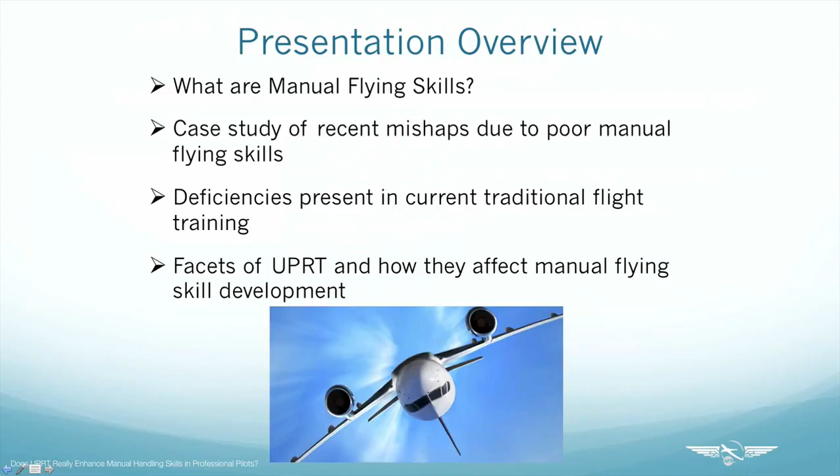So again, does UPRT really enhance manual flying skills in professional pilots? This is a broad question, encompassing both objective and subjective subject matter, which spans many different facets of aviation. First, the term manual handling skills needs discussion and definition before we explore the rest of this.

Manual flying is generally thought of as those flying abilities a pilot uses to fly the aircraft only by reference to the raw data presented in the forms of airspeed, attitude, altitude, vertical speed, and so on, through direct manipulation of the controls without the aid of automation.

This automation includes, but is not limited to, autopilot systems, autothrottles, and the variety of flight management systems currently equipped in many modern-day aircraft. These skills include complex problem solving in a crew environment, with time as a critical factor.

Basic navigation equipment usage and manual trim adjustments can be considered manual flying as well, depending on the sophistication of the equipment, really. Taking this a step further, especially as it relates to modern aviation, a pilot's flying technique may...

...combine the already mentioned manual flying skills with combinations of automatic speed and direction control and guidance. These combined inputs usually occur through individual pilot habit patterns or preferences, procedural requirements, operational standards, or when automated systems fail.

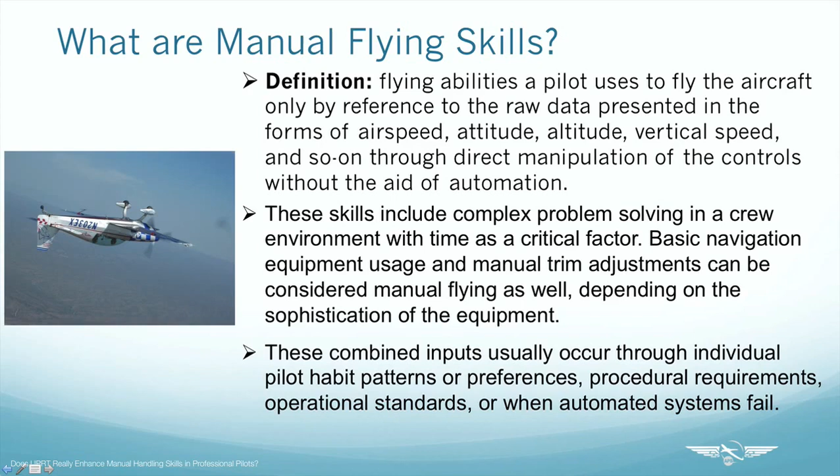The latter of these instances, the failure of automation, is a circumstance that is rare, but is cited as a contributing factor in several recent and deadly crashes. The failure of automation, or perhaps even worse, degraded modes of automatic flight, make the pilot's manual handling skills incredibly important, and are often the decisive factor between life or death in an upset.

Examination of some recent fatal accidents in the industry can provide valuable insight into the importance of manual handling, especially for pilots flying more sophisticated aircraft with advanced flight control and automation systems. The first one we'll look at is China Airlines Flight 140. We'll follow that with a look at Colgan Air Flight 3407, and finally, Air France Flight 447.

The first example, China Airlines Flight 140, was an Airbus A300-600R, which crashed on an approach to runway 34 at Nagoya Airport, Japan, on April 26, 1994. The co-pilot, who was the pilot flying at the time, after several inappropriate activations of the go-around mode on approach, and several subsequent cautions from the captain, inadvertently selected the takeoff go-around, or TOGA, mode on the approach.

The aircraft pitched up and immediately stalled. This led to a loss of control and a tail-first impact with the ground. The crew failed to recognize the stall or apply appropriate manual handling skills on manual approach. The reliance on automation and unfamiliarity of the crew with manual handling characteristics of their particular aircraft led to the deaths of 264 people and 7 more injured critically.

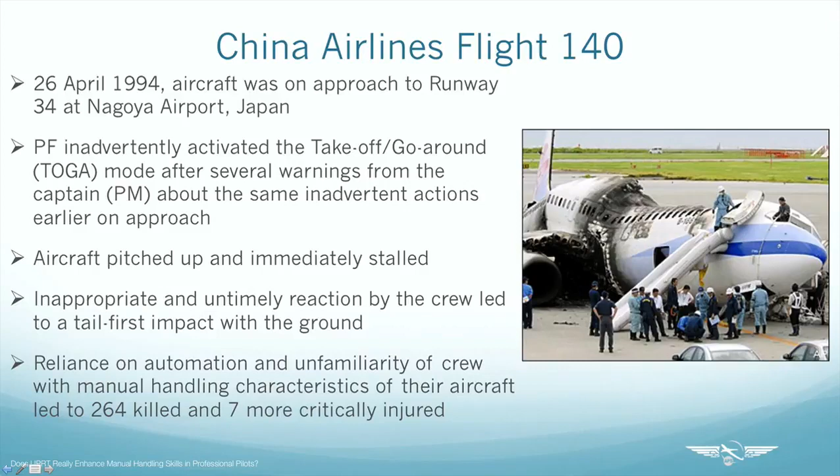The second mishap is much more recent. This is Colgan Air Flight 3407, a DHC-8-400, which was on a code-share agreement with Continental Airlines, and it crashed into a residential area near Buffalo Niagara International Airport while on an ILS approach at night in visual meteorological conditions.

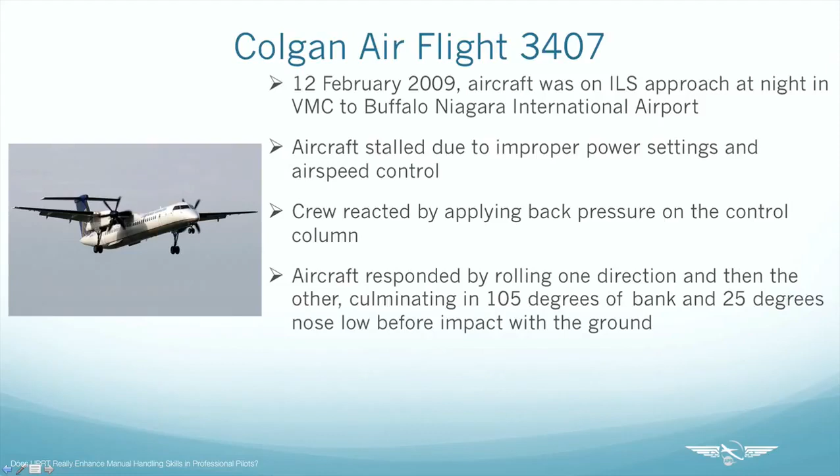The aircraft entered a stalled condition due to improper power settings and airspeed control, and the crew reacted by pulling on the control column, which increased the angle of attack further and worsened the stall condition. The aircraft responded by rolling one direction and then the other, culminating in 105 degrees of bank and 25 degrees nose low before impact with the ground.

Following the crew's inappropriate reaction, they lost control of the aircraft, which resulted in the fatal crash that killed 49 people and one person on the ground.

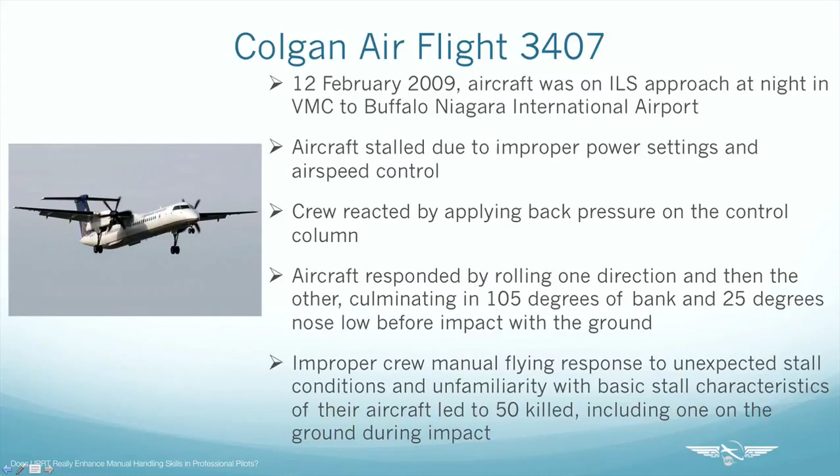Finally, and much more publicized worldwide, is the crash of Air France Flight 447, which was an Airbus A330-200 that departed Rio de Janeiro, Brazil, on the 1st of June 2009, and crashed into the Atlantic Ocean en route to Paris, France.

After a two-year-long multinational effort to find the crashed aircraft at the bottom of the ocean, the wreckage was finally recovered.

The data recovered showed that a loss of airspeed sensing resulted in the aircraft's fly-by-wire system degrading to a mode of control with fewer protections than the crew was used to having.

At 35,000 feet, the aircraft stalled, and the crew responded with a pull on the control stick and maintained that pull, holding the aircraft in the stalled condition for over 4.5 minutes until impact with the water.

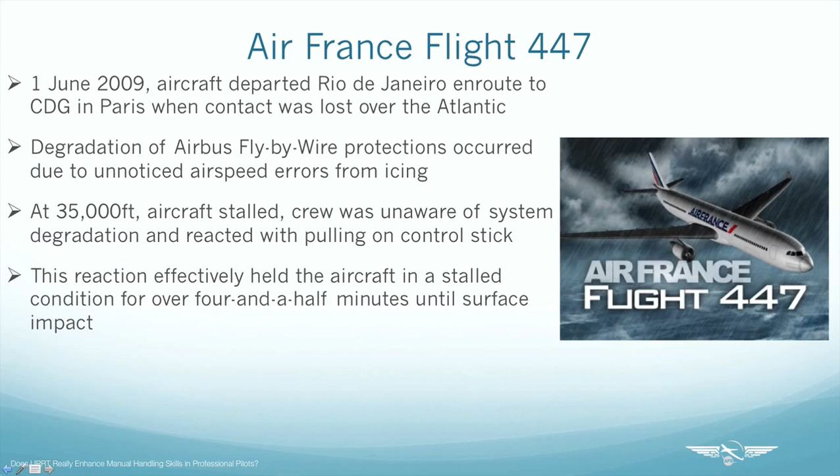Improper crew manual flying response to an unexpected stall condition and unfamiliarity with basic stall characteristics of their aircraft led to the 228 souls aboard all lost, and an exhaustive 2-year search to find the remains.

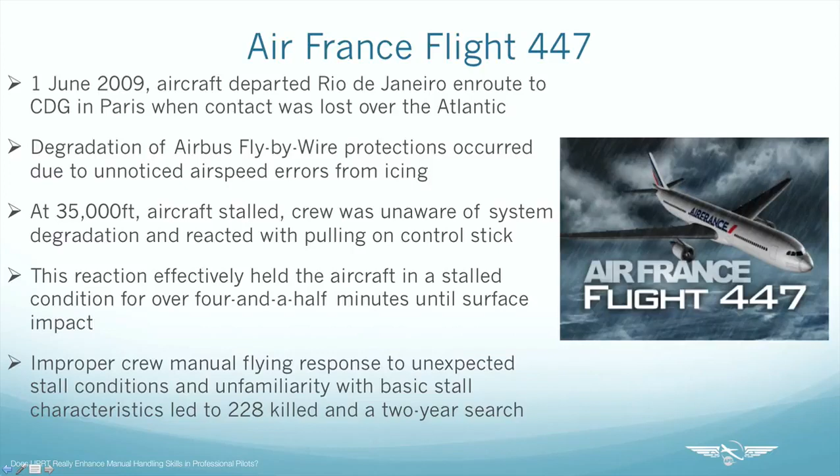These are all sobering examples of sophisticated aircraft ending up destroyed with massive loss of life, in large part due to the lack of manual handling skills of the crew members faced with the degradation of their normal automatic mode of operation. So why do we look at these case studies here?

Well, it had a resounding impact on the industry worldwide. Although there is seldom just a single causal factor to any accident, the loss of control that made these accidents so horrific would most likely never have occurred had the pilots been better prepared to take over manually.

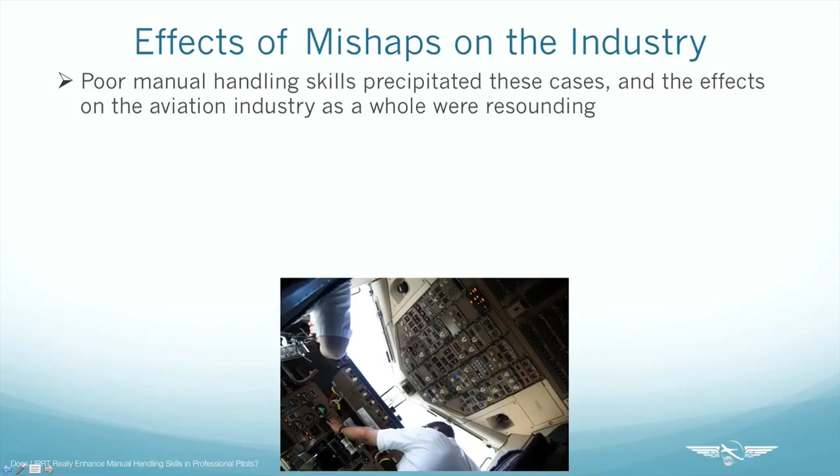So it becomes painfully clear that manual handling, as described earlier, is a critical dimension to the professional pilot's skill sets. The public outcry over the discovery that Air France 447 went down as a result of a loss of control in flight, exacerbated by an inappropriate crew response, accelerated a long overdue response from the industry that was set in motion by the Colgan accident.

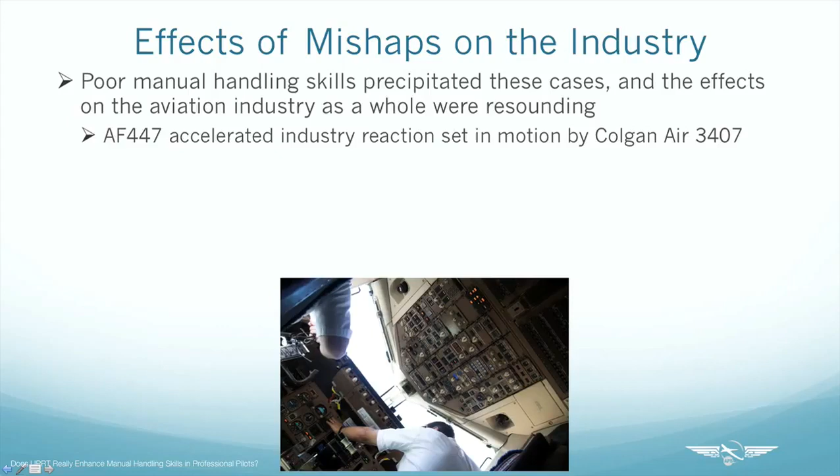Andy Pasztor of the Wall Street Journal wrote, 'The latest revelations, according to safety experts and others familiar with them, are likely to add pressure to revamp training practices to help both new and experienced pilots cope with high-altitude stalls, upsets, and faulty airspeed sensors.'

That was written in 2011, and shortly following that, a massive reappraisal of pilot training practices throughout the country in the U.S. occurred, and the industry faced pressure from the public and government to address the deficiencies in training that caused these events.

Examination of the undue reliance on automation and the conclusion that the incident could have been avoided had the pilots received more training in manual flying and stall recognition. This all resulted in new ATP rules in the U.S., which focused on the undue reliance on automation that many air crews have.

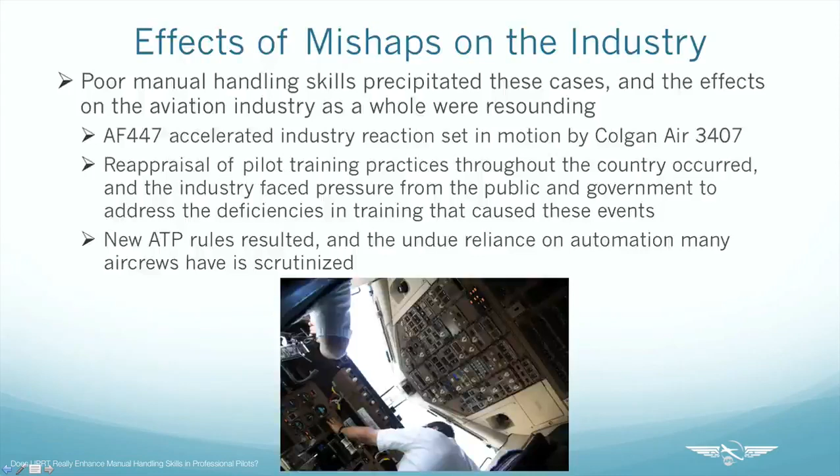All too often during traditional flight training, stalls and upsets are treated as scripted events, where the setup and approach to the maneuver demands more focus than the recovery itself.

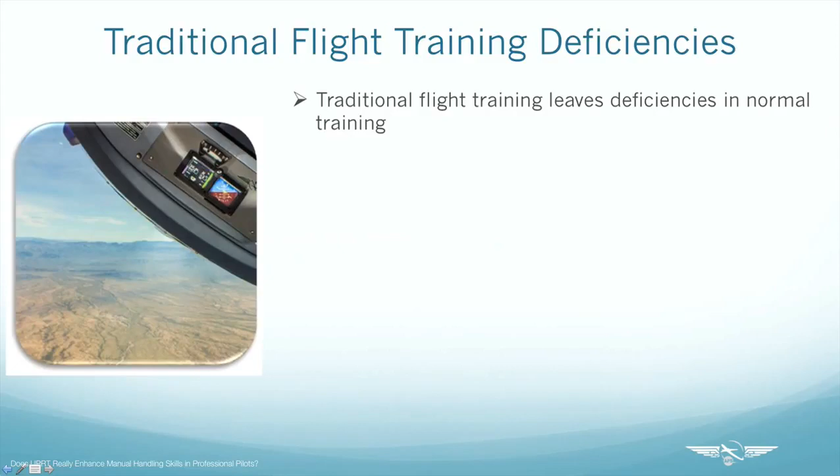A pilot untrained on upset prevention and recovery possesses manual handling skills acquired from their traditional flight training. This training, in most cases, is designed to satisfy the respective national aviation authorities' testing standards in the country of training for certification of pilot licenses.

In other words, the training is designed for the student to pass a check ride. Great emphasis is placed on procedures used to prepare and configure for a very limited set of stalls and unusual attitudes.

Rich Stowell, a multiple-time master CFI aerobatic and published flight training author, stated, 'Treated as an independent maneuver unto itself,' in reference to stalls and unusual attitudes during certification training, 'the whole ordeal is often enveloped in unnecessary melodrama as well. The actual lessons learned, however, are fear and a false association between the stall and slow airspeed.'

As a result, all too often a poor and dangerous strategy may develop that seems quite plausible: flying faster to provide a larger margin against these stalls that are misunderstood and are perceived as frightening.

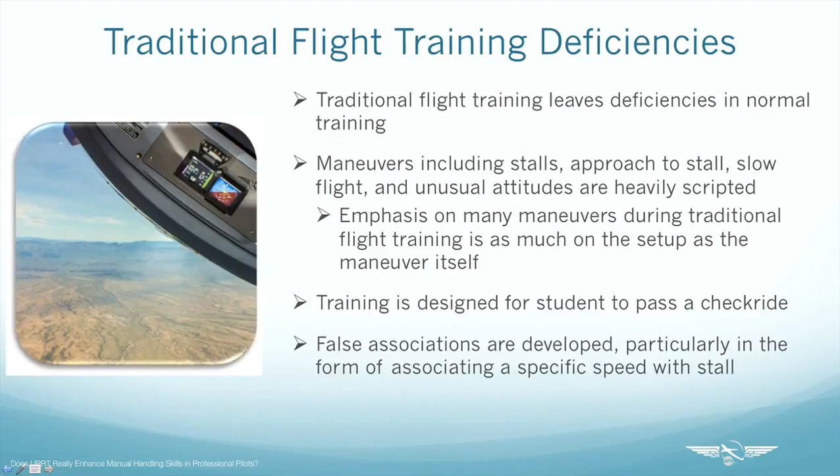This shows an inherent weakness in UPRT deficient pilots, or more succinctly stated, a gap of knowledge exists on a critical portion of the aircraft's performance, the stall, which is the leading cause of loss of control in flight.

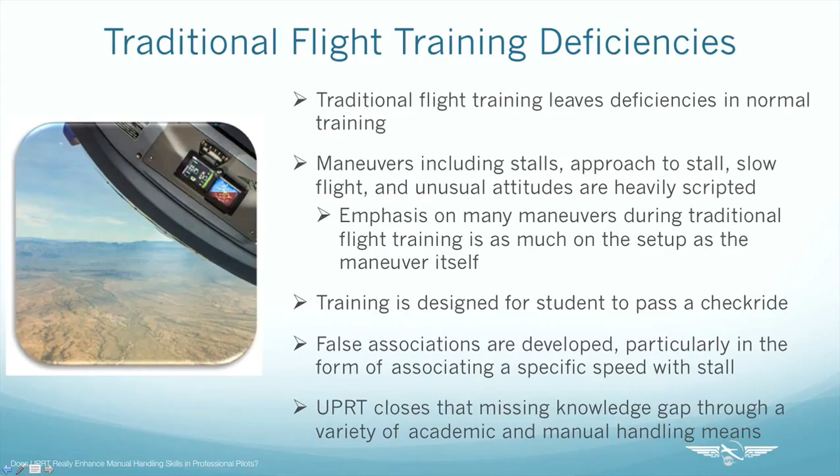Upset prevention recovery training seeks to close that gap, to fill in those missing pieces of learned manual handling ability through a variety of means.

The first step in the process is an expansion of what can be termed book knowledge, by examination and review of those aerodynamic factors that apply to all fixed-wing aircraft.

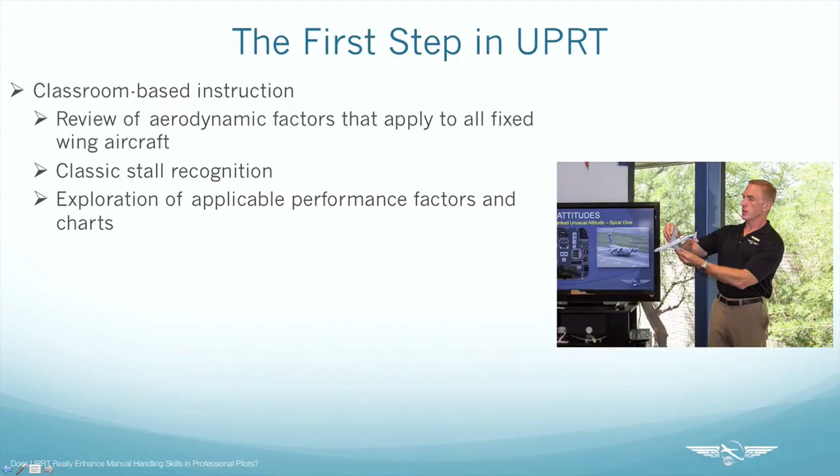Classic stall recognition and their techniques for recovery are covered. Exploration of applicable performance charts relating load factor, bank angles, velocity, and other aerodynamic subjects is conducted. And case studies highlighting proper and improper use of recovery procedures are detailed. This portion of UPRT is absolutely vital and sets a solid foundation for understanding.

The understanding needs to be why prevention and recovery steps are designed the way they are. Armed with this knowledge, the UPRT pilot in training is equipped to execute on-aircraft training using the techniques and strategies covered in the classroom. This classroom step in UPRT is absolutely vital and provides a foundation upon which all future training will happen.

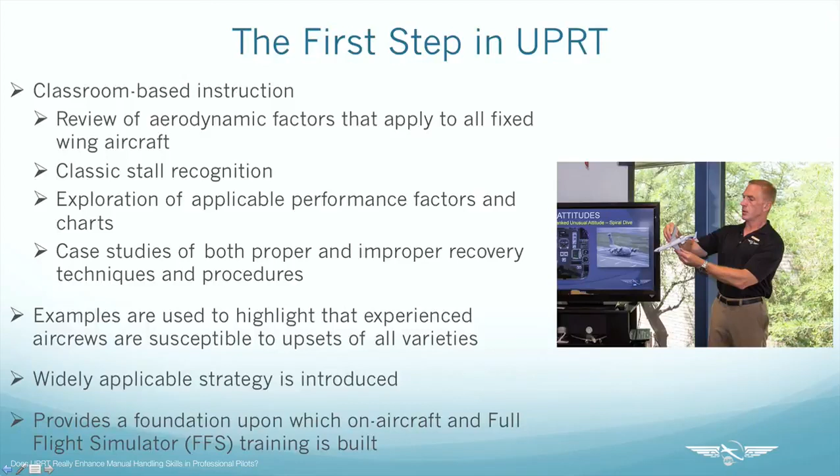The classroom training, if there's flight simulator training involved in the program, is absolutely critical. On-aircraft flight training in an appropriate aircraft is the next step in UPRT.

An aerobatic capable aircraft is recommended by several regulatory agencies, including the FAA and the International Civil Aviation Organization, or ICAO. They recommend conducting on-aircraft UPRT in aerobatic category aircraft to expose pilots to maneuvers such as uncoordinated stalls and spiral dives, which in a normal or transport category aircraft would put the crew at high risk to enter spins or other loss of control events that could be unrecoverable due to decreased safety margins. Aerobatic aircraft have a much higher safety margin and ability to conduct all-attitude, all-envelope training than other aircraft types, particularly transport category airplanes.

This begs the question, can jet pilots really learn upset prevention and recovery in a single-engine piston airplane? The answer is in the question itself. A jet is an airplane, subject to the same general aerodynamic laws as a single-engine piston aircraft. Granted, each has differences in pitch moments with power changes, keel effect, turning tendencies, and yaw damping considerations, among many other things, but these differences make up an estimated 5% disparity between aircraft types.

With that said, the training industry agrees that type-specific considerations are critical to effective UPRT skill development and must be comprehensively addressed during type rating and recurrent training. But overall, an airplane is an airplane, and virtually all pilots begin their careers in the same kind, a single-engine piston airplane. Upset training is intended to be transferable. It should follow a pilot through his or her career, and the tenets taught during early training should be relatable to any fixed-wing aircraft.

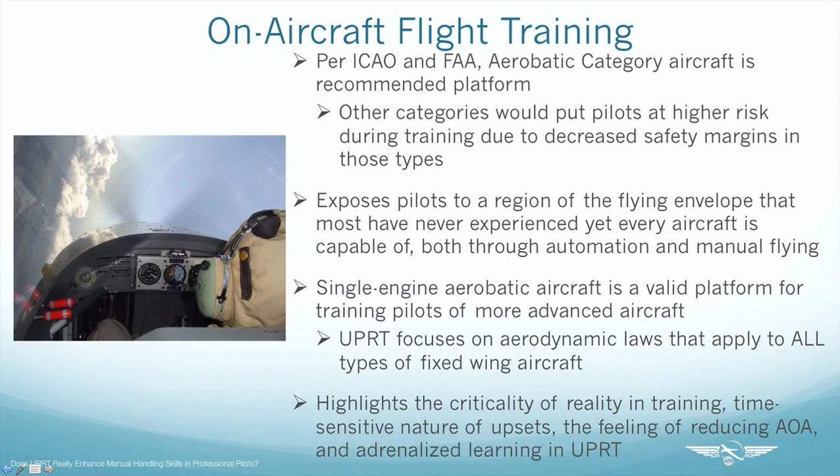Now, a final stage in UPRT is to place the pilot in training in a full flight simulator and practice these upset prevention and recovery training techniques in a wide variety of situations.

Once the basics of upset prevention and recovery and the general strategies are learned, it is equally vital to allow the pilot in training to experience these strategies in a full flight simulator that more closely resembles their normal flight environment. This allows them to realize fully that UPRT works in any airplane, and helps them correlate the aerodynamic lessons learned during upset prevention recovery training and apply them to their own aircraft or one of a similar type and category.

Furthermore, crew resource management is tested, and UPRT is applied to this kind of environment, because manual flying doesn't always apply only to the pilot flying, but also to his or her crew members as well.

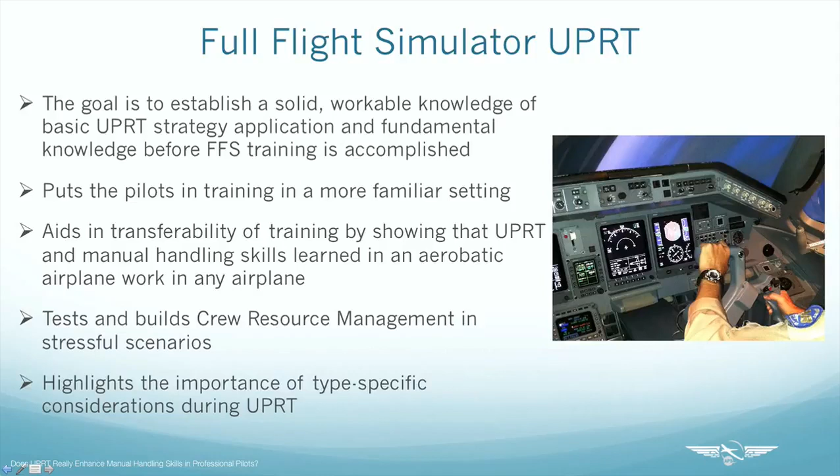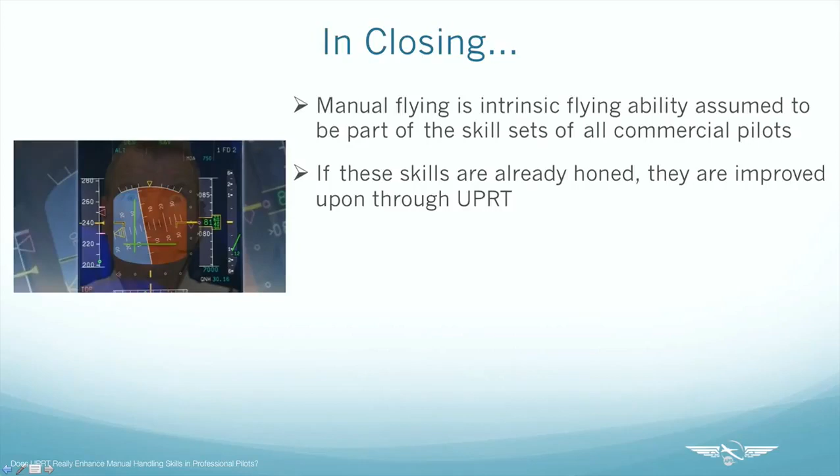Now, in closing, manual flying can be described as intrinsic flying ability, assumed at least by the flying public to be part of the skill set of all commercial pilots. If present, even innate skills can be improved upon, polished, and expanded. If these skills are not present, they can be learned. Manual flying skills include everything from basic instrument reference and simple flight control inputs to complex problem solving in a crew environment when time is of the essence. Upset prevention and recovery training is aimed at improving and building upon these basic skills and teaching new ones for the unexpected.

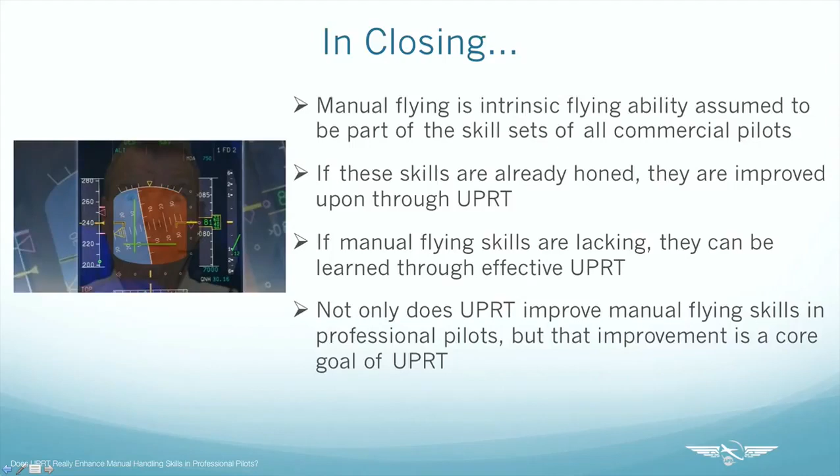In a perfect world, use of upset prevention and recovery training would never be required. But this is not a perfect world, and the unexpected happens every day. So does upset prevention and recovery training really enhance manual handling skills in professional pilots? Absolutely, and without question it does. In fact, improving manual handling is a core goal of upset prevention and recovery training.

This is how I see it. Chance favors the prepared mind, Louis Pasteur once wrote. And upset prevention and recovery training is a critical facet in that preparation for every pilot.